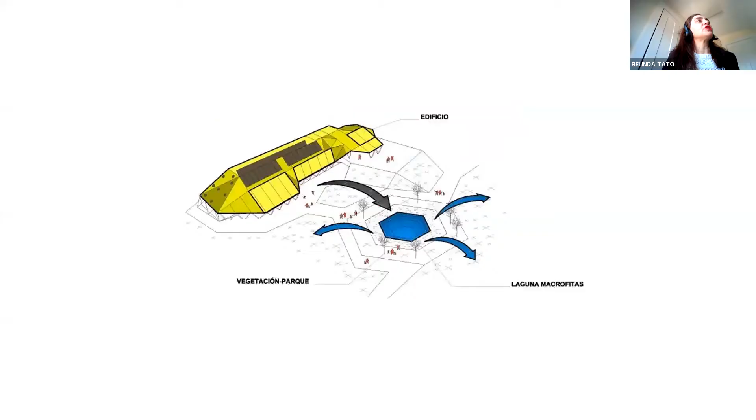The competition was calling for the creation of a new kindergarten, and it was very important for us not only to deliver a good quality, energy efficient building as an architectural piece, but also to provide some kind of publicness or public space linked to it, because in these suburban communities, schools play an important role in creating social fabric and opportunities for people to interact.

Also, because of the location in Madrid, and the tricky future regarding water scarcity, it was important for us to deliver a solution that could recycle all the wastewater from the building. So it wasn't only about rainwater, which can be stored, purified and reused, but also the wastewater from the building.

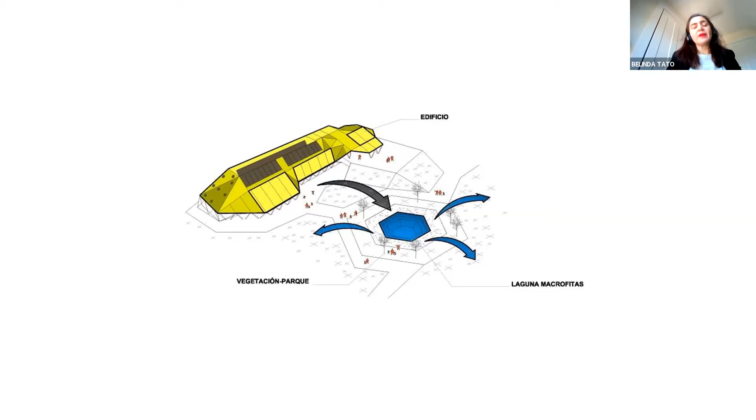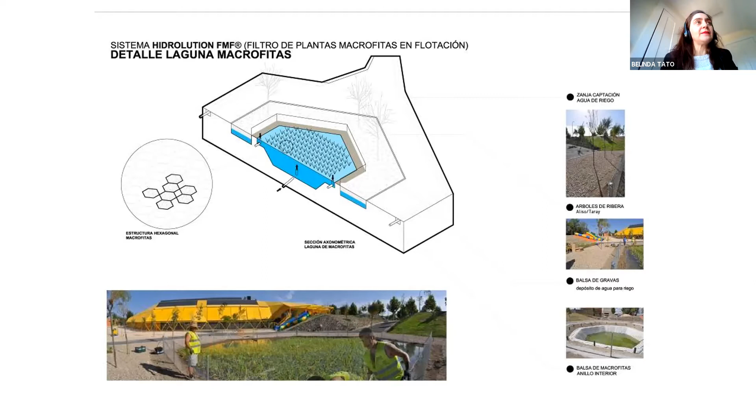So the initial idea was to create this kind of lagoon, and we partnered up with a company that works with macrophyte plants. These plants can clean the wastewater so that we have that water available for reuse.

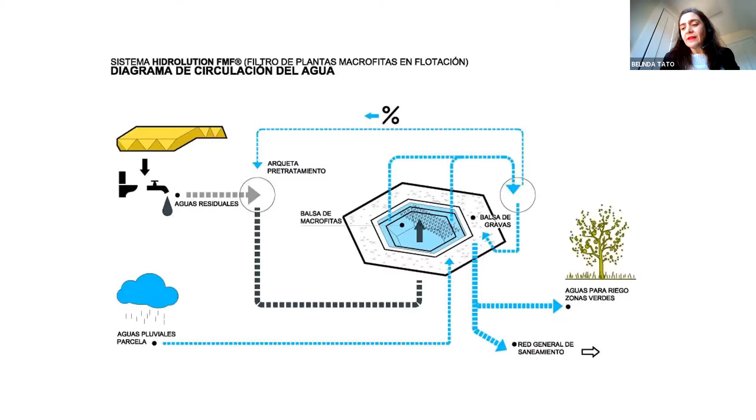It was important not only to deal with recycling the water itself, but also to embed that message and make the space educational, so that not only the school community, but the larger community, becomes aware of water scarcity and everything else.

This is how the plants are floating. The company designed these elements which float in the water, with plants and roots hanging in the water. This is the tank during construction, where the water is stored, then stored underground, and can be reutilized for irrigation of the park.

One of the challenges was that unless we could provide this recycled water, we should not be introducing green lawns, because there's a scarcity of water. It doesn't make sense to use potable water for that.

The site is a very rough environment. It's an industrial site, surrounded by industrial warehouses, with a lot of trucks driving by, and therefore noise and pollution.

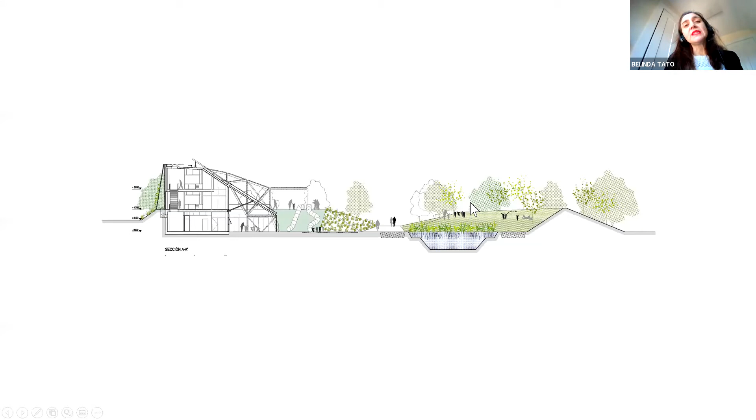The whole idea of the intervention was to create this kind of buffer public space. We created topographies to provide protection for the kids, who are between 0 and 3 years old. The idea was that parents wouldn't just drop kids off from the car, but would actually enter the public space to use the building. These are some images from the building when it was finalized.

Another important aspect, in terms of architectural resolution, is that it's a Class A energy efficient building. We worked with textile awnings that can be operated so that during winter we capture as much sunlight as possible to reduce the energy bill, while in summer they protect the facade and make it efficient.

The space has become a hotspot, a popular space even on weekends, with kids and teenagers hanging out here. It has become a landmark or beacon in the city of Rivas, and people come and are very proud of the space. So we are changing people's lives, because this was an industrial site. It is a kindergarten, but it's much more than that.

It's a public space, it's a gathering space. Here you can see the macrophytes when they're more grown, and it had to be fenced in the end, which was not originally planned, but that's because the deposit is like 20 feet deep. So it made all the sense.

The building has been awarded and has received a number of recognitions, but the most important is that it has had an impact in people's minds and on people who live there.

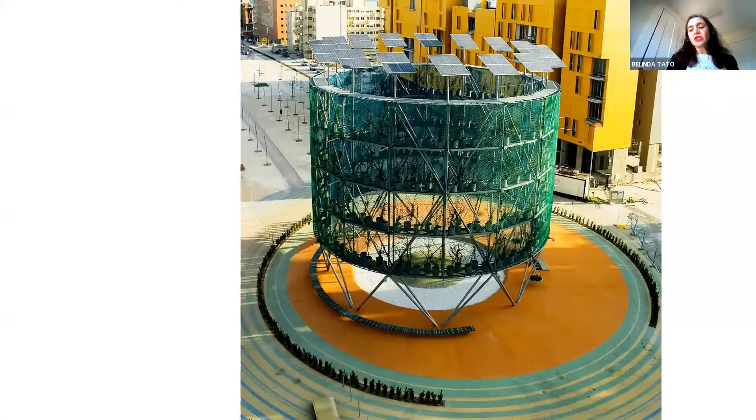This is another project, and the scope here was different. It was a boulevard 500 meters long and 50 meters wide, and the starting point was a kind of planning which is completely new. It's a new suburb in Madrid, but the planning has very little to do with the Mediterranean way of life in which we occupy public space actively. So the original plan was not considering any factor about human scale. It was very much about mobility, cars moving easily throughout the neighborhood, and concentrating all the economic and commercial activity in one spot.

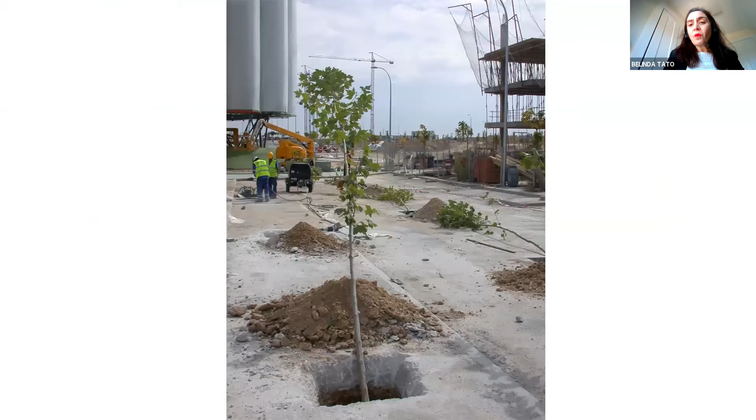It's very little connected to the culture we have locally, which is very much about intensively using public space. So one of the main actions, together with these more iconic interventions, was to plant more trees. We multiplied by three the number of original trees by sacrificing some of the parking lanes. The idea was, looking at this street in the context of the whole neighborhood, it didn't make sense to have such huge space devoted to cars. So we were creating a more pedestrian-friendly street.

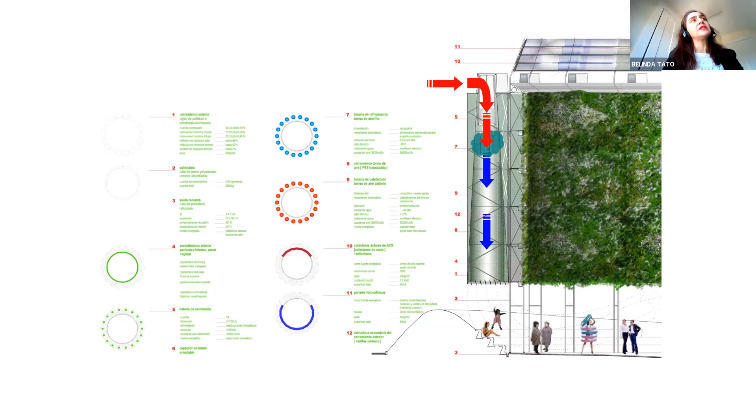The other main idea was to create a climatically comfortable solution. The whole point was about summer, because summer is very tough in Madrid - it's very dry and temperatures are very high. So the idea was, how can we, using low tech and low means and off-the-shelf elements already in the greenhouse industry, lower the temperature by introducing water atomizers? We created these elements - three different ones - but the elements are always the same, just assembled differently. The idea was to create this gathering space, public space, introducing vegetation and misting.

The most exciting part for us is to see that a street that was devoted completely to cars and had nothing to be around for has become a very popular space for different kinds of events. It's been exciting to see concerts, plays, community meetings, and all sorts of activities there.

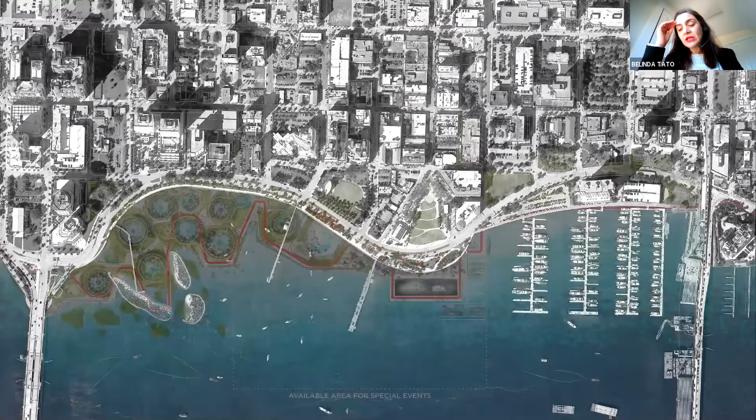This is the city of West Palm Beach. It's interesting because it doesn't have a beach, and the relationship with the water is very tough. There is this harsh, concrete limit between the water and the natural systems and the city. It's also very exposed to hurricanes and other climatic hazard elements.

Our proposal was about how can we reactivate this public space by improving the climatic comfort. As an outsider, coming from a country and culture where we occupy and use public space a lot, even in the summer, it was very shocking for me to see this huge culture around air conditioning here. Actually during the summer, it's the low season because it's very hot and humid.

But for the rest of the year, it's extremely beautiful. I'd say 10 months out of 12 is pretty good to be outside. But still, public space is not that exciting. There's not that many activities, not that many programs.

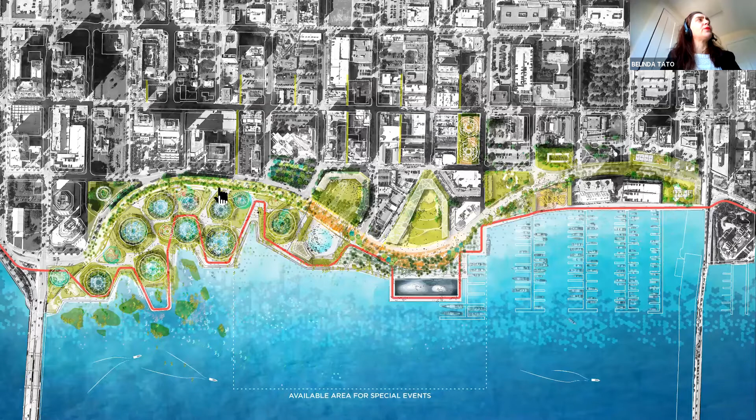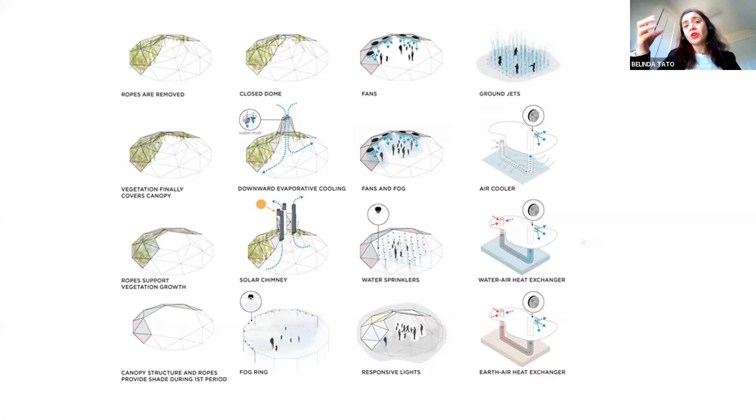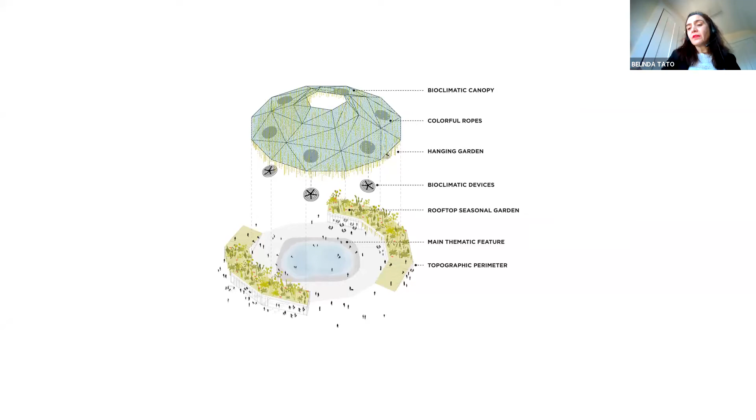So our proposal was about creating these canopies, which would create a different condition, a different relationship between the city and the lagoon. It was about producing a catalog of low-tech solutions that would enable different programs to be hosted — the ground level, the canopy, bioclimatic devices used for different moments during the year.

And the experience of embedding a swimming pool as a feature in public space. We were focusing on climatic comfort and public space redevelopment, but there was an underlying condition about creating equity — because downtown is beautiful and has a lot of amenities, but many neighborhoods are completely underequipped and don't have easy accessibility to the city center.

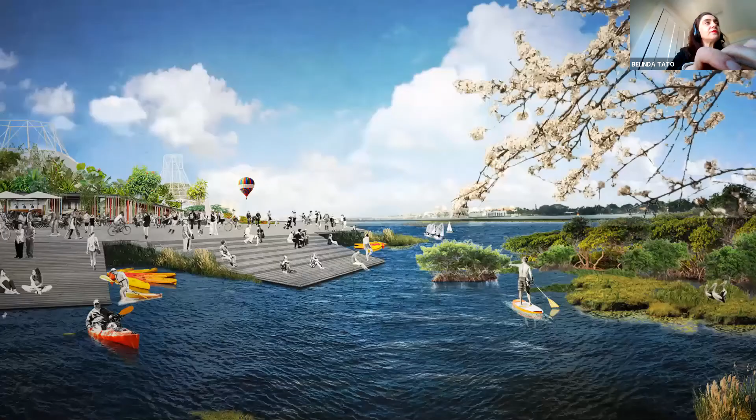So here we have this buffer interface between the city and the water, not only planning for today but also for the future — considering sea level rise and solutions that could react and respond to it. We created a catalog of different conditions for different areas of the waterfront and the city.

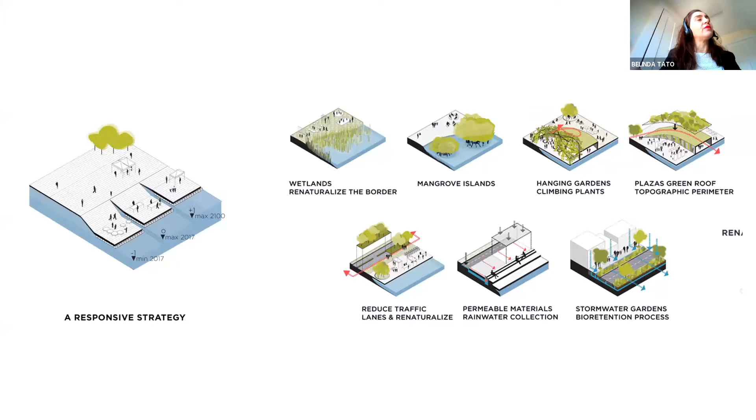Another part of this competition was to redo or upgrade an existing garage building. Again, the idea was to introduce programs which would enable different kinds of people to come in and use the city center, but with a bioclimatic approach.

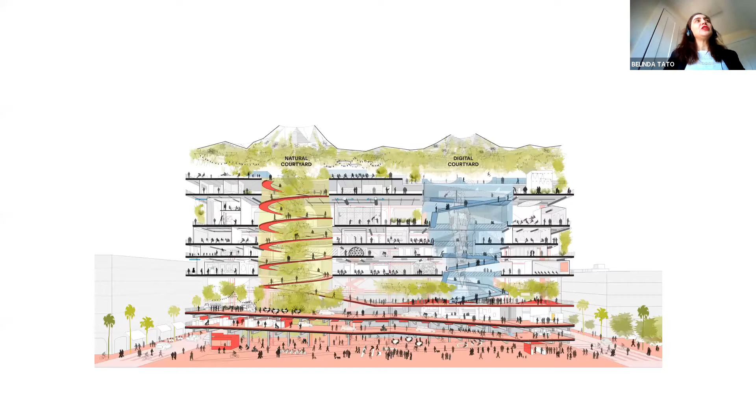As you can see in the section, the red line is a promenade or street that goes all the way from the ground level through this ramp to the rooftop — bringing publicness into a hybrid building that would allocate a number of different programs.

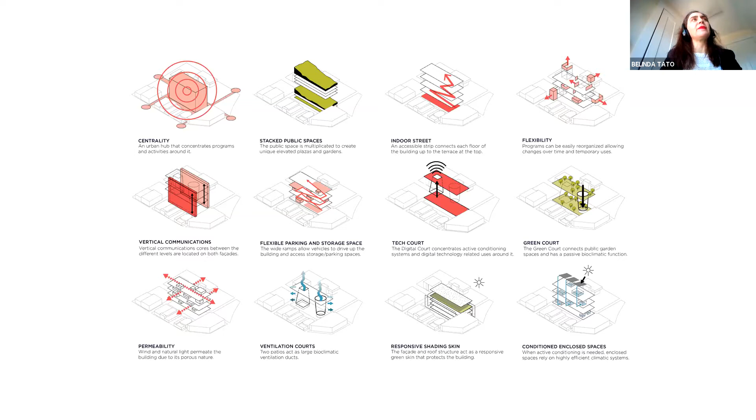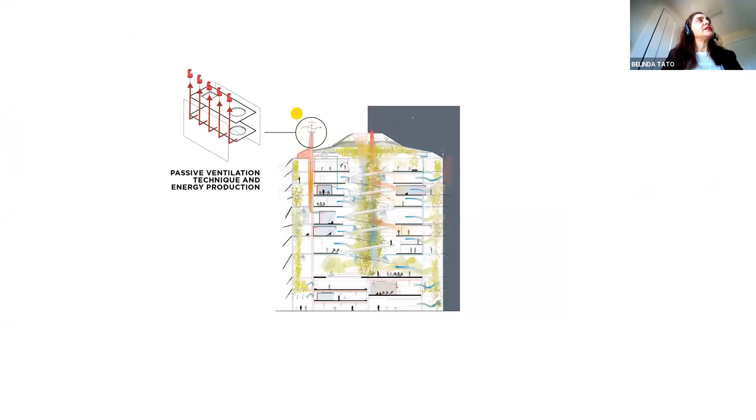Here are some concepts related to the bioclimatic performance and the programs. The idea was to have this natural courtyard, filtrating the air and lowering the temperature, with different systems for both day and night. This is an image of the rooftop.

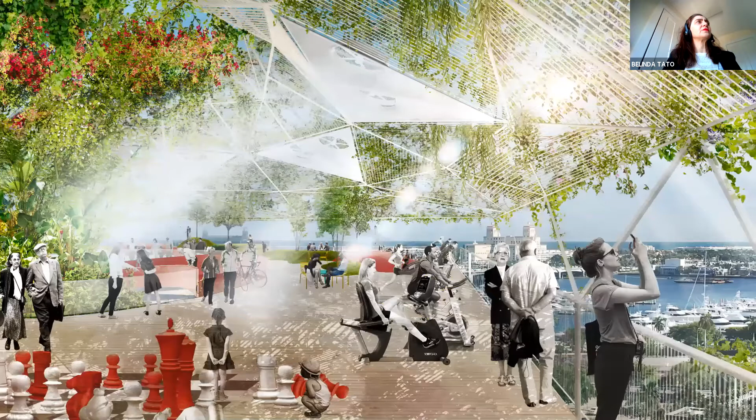This was a buffer space between the existing building and the new addition, with food trucks and everything — how can we bring this kind of public space to this elevated platform.

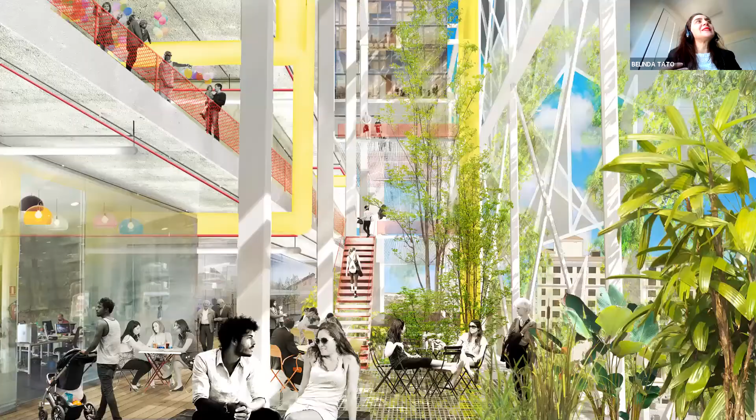And always with this bioclimatic filter or buffer, there are kind of two facades that operate together to lower down the temperature. The idea was to not provide air conditioning to every system, so there were different degrees of climatic performance according to the different programs operating in the building. The idea was also to have a day and night building that would operate for different programs, trying to understand how the circulations would be compatible for these different users and programs.

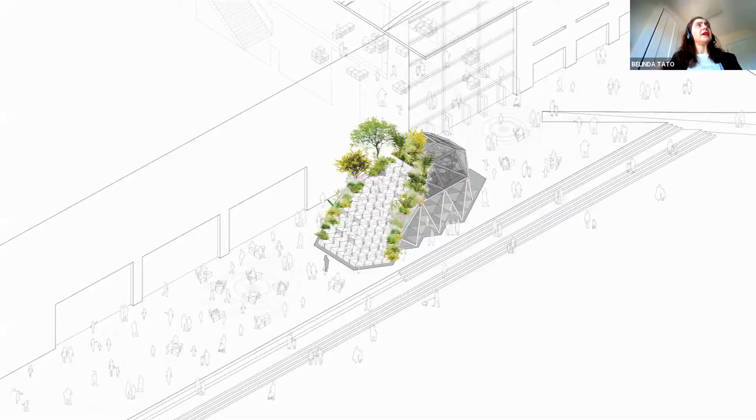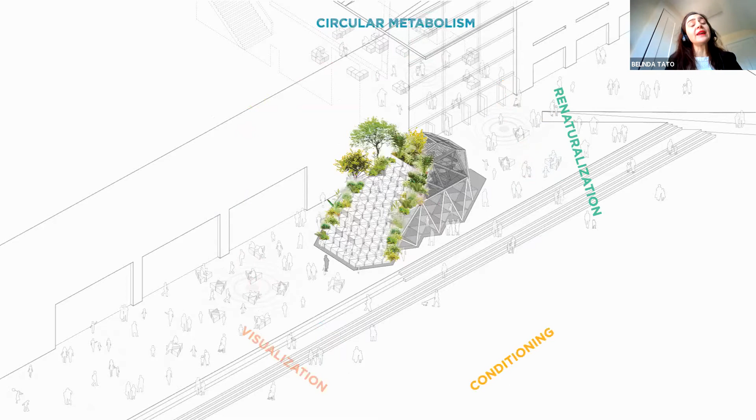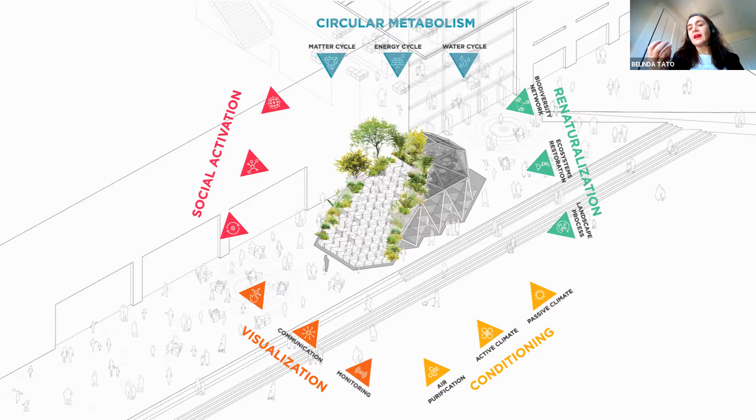This is a small project to be built in the next few months. It is an installation in front of a cultural institution in Spain, and again it has this environmental component, but also an educational component. It is about recreating the Mediterranean forest, trying to make it a kind of landmark and a point of entrance into the cultural institution.

Regarding the second aspect, which is technology, we have been exploring over these last few years ways of engaging with the community and getting people engaged with their public space and with others through the use of technology. I'll be showing a project in Malaga that we are currently implementing. It's under construction right now.

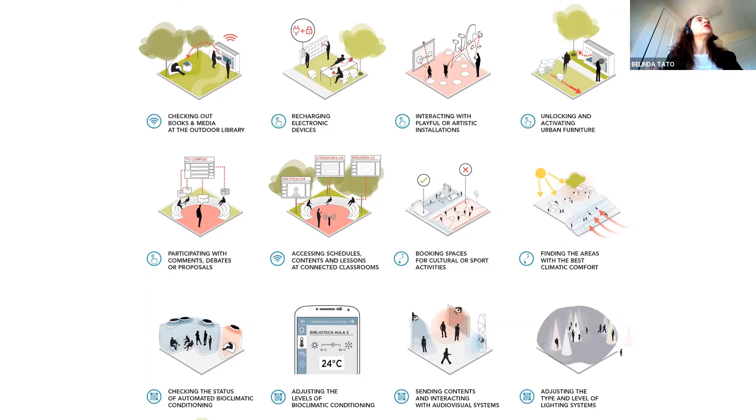It is about how we can transform public space into a space that can be customized for different uses and different programs. We've been exploring this idea of how we could have a classroom operating in public space. This has not emerged because of COVID, which is interesting because it's actually very relevant — this project was designed before the COVID situation, but it plays with the idea that in certain contexts, climatic conditions allow you to have a more intense use of public space, and how we can explore different possibilities of being outside and interacting with others, making the most of it.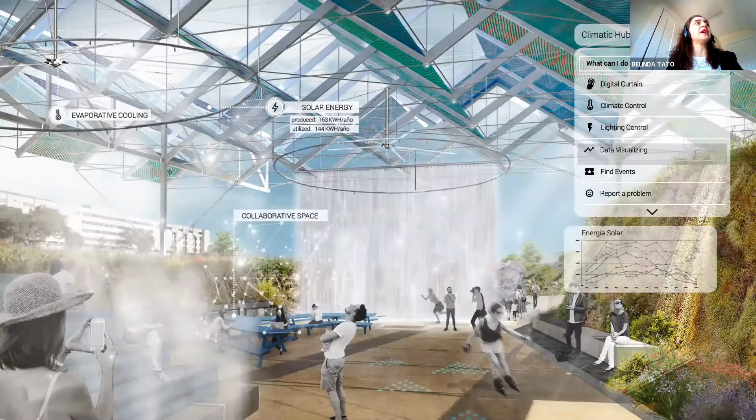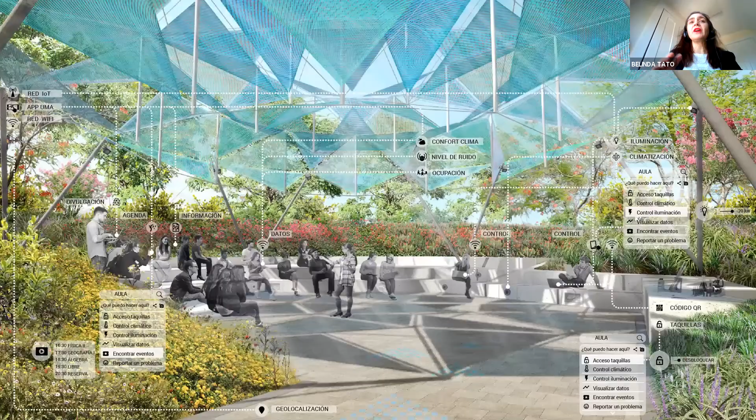So these are kind of portions from this Malaga project. The Malaga project is for the university campus, a 2-kilometer boulevard. The starting point was: can we bring some of the academic activity that usually takes place indoors, and doesn't blend with the city or citizens at all, can we bring it outside? Can we create a more exciting experience, both for the students and for the citizens? And how can we enhance this experience by introducing features that can be customized for day, for night, for lighting conditions, for climatic conditions, and so on, for projections and so on.

This is a small project we designed for the city of Dordrecht in the Netherlands. The departure point was to create a playful object, a kind of playground for kids. We like to think of sustainability as something positive, something we can embed into projects, and something that should be playful. We should also empower and educate the younger generations, because they're the ones who will be taking over and leading the world in a few more years.

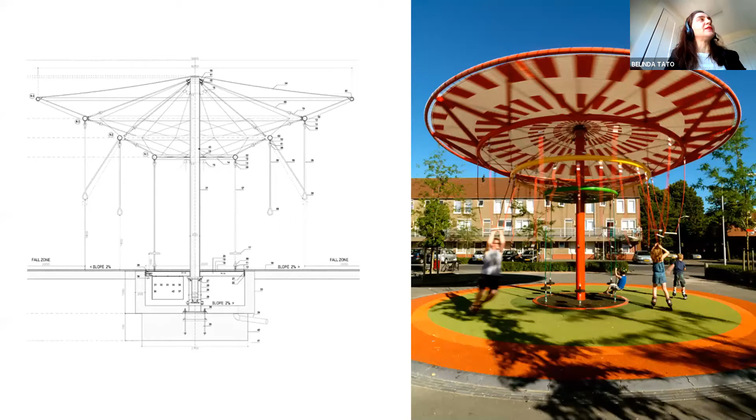The project plays with the idea of producing energy from the rotation of the carousel during the day, so that energy can be utilized for lighting during the night. So the more the kids play, the more energy is produced and the better the lighting will be. This was implemented, and it was very interesting and very challenging, because complying with all the European codes regarding playgrounds was very tough, but we managed. In the end, we saw kids using it in very crazy ways that were not expected.

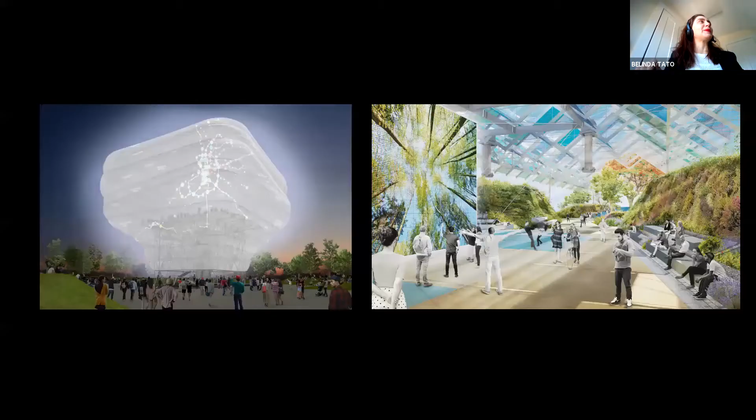This is a small project we conceived for the city of Madrid, again as a beacon in which people could interact and relate to each other, sharing content through this kind of landmark element. This is the project, and the one on the right is the Malaga project that we will see in more detail later.

It's about using — I would like to say that of course we are not software developers, we have cooperated with software developers — but the most interesting part is thinking about how we can take advantage of today's technologies that are already on the market, already accessible, to introduce and hack the public space and use it in different ways.

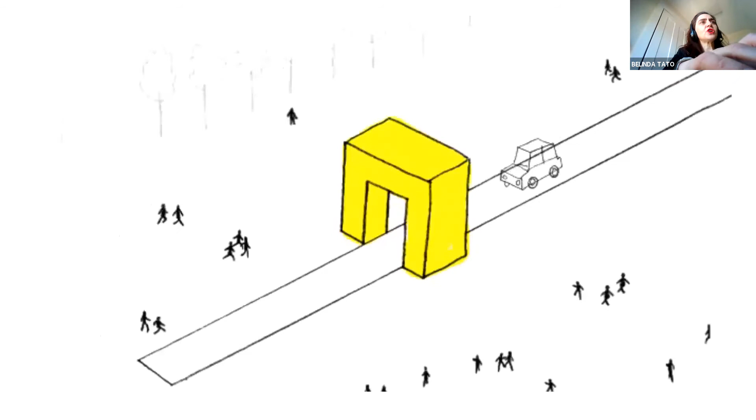We entered a competition in which they were calling for an artistic intervention in the main public space of the city. Our approach was: instead of having a single mind or a single team designing an art intervention, why don't we design a process that is collective, that engages the local community, and thinks about the future not only of the square, but also engages a larger conversation. The competition had different stages, and this was the final stage in which we delivered this video together with a booklet. So we're going to watch it.

As I was saying, they were calling for this competition, and our initial motto was: instead of one square, it's 1,000 squares. Why don't you, instead of using that huge budget on doing something final conceived by a single mind, create a process in which you can test out different ideas, different solutions, and engage the community along the process. So we won the competition, and that started a negotiation process with the board of the city, but we managed.

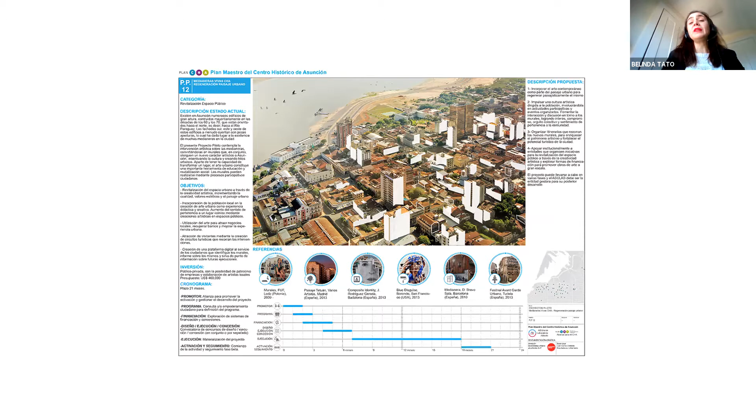One of these pilot projects was about transforming party walls into canvases and inviting artists from the country, or from around, to produce an art piece throughout the city. They did this, and it was a beautiful festival organized for only a few days, with artists invited from all Latin America. So with just a few resources, a whole kind of transformation could happen.

And not only that, but it was also about creating a completely new mindset about the city center, and getting people to walk the city in a completely different way, with new lenses about these art interventions.

So we also work with these two colors, red for the problems, blue for the opportunities. And it's kind of tricky because when you come to a place, you ask for people's time and dedication, and they're very generous to be part of it. You have to find a way to give something in return.

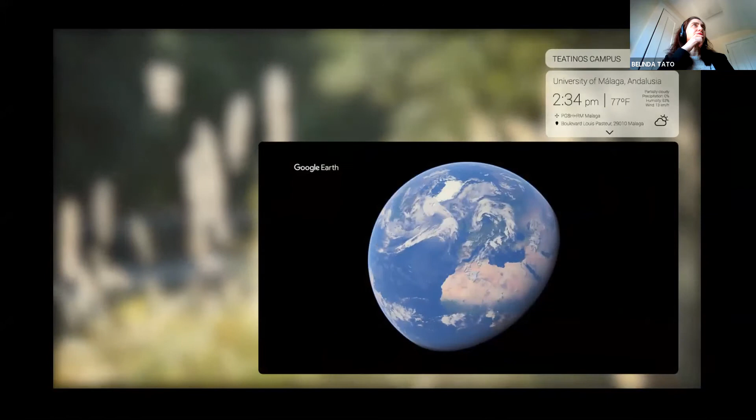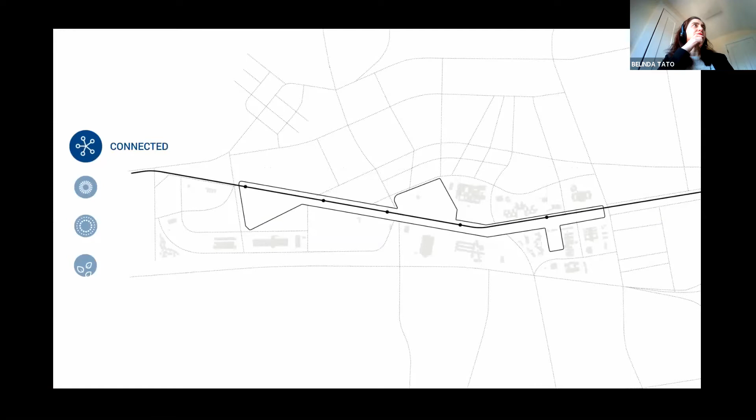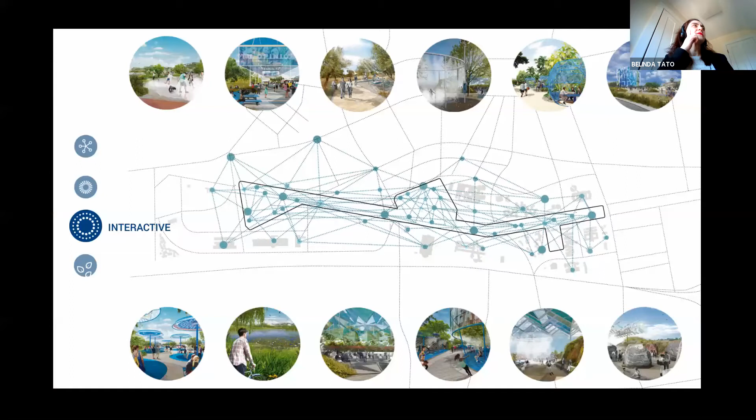The main boulevard at the Universidad de Málaga connects existing facilities and opens up the campus to the public, creating a pedestrian walkway activated by hubs or public squares with learning and leisure spaces, incorporating technology to create an interactive urban environment connected to the digital world, an ecological corridor that efficiently manages resources, creating diverse natural landscapes.

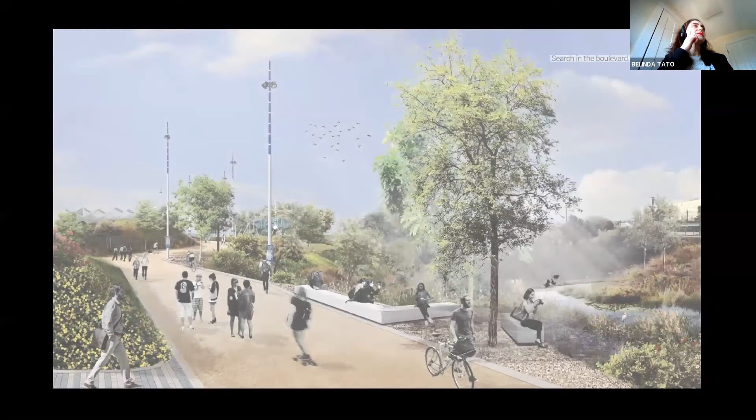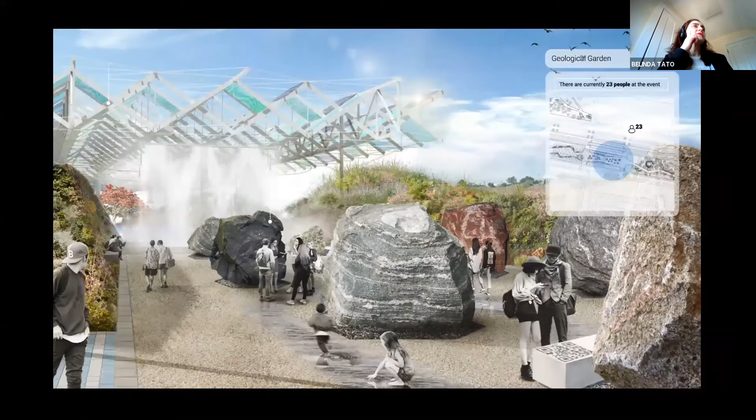Pedestrian walkways protected by natural buffers become the perfect setting for meeting up, resting, and relaxing. Through a digital application, users can interact with the surrounding environment and access an augmented reality with academic and cultural content.

The Climatic and Digital Hub integrates collaborative learning spaces, allows the interactive modification of environmental conditions, and generates all of the park's energy. The Hub's canopy hosts technological systems that connect users to the physical space and the digital environment.

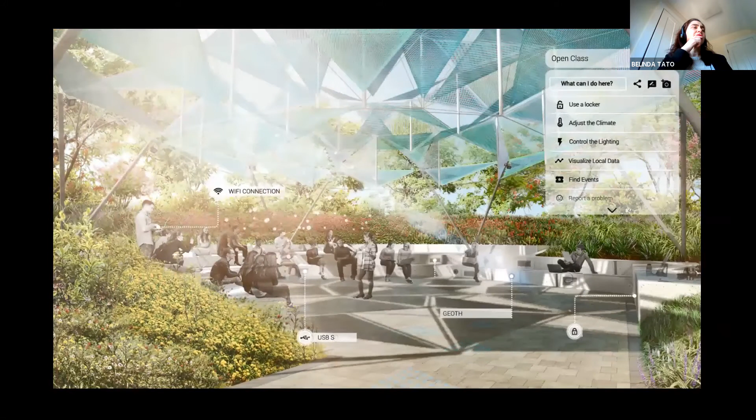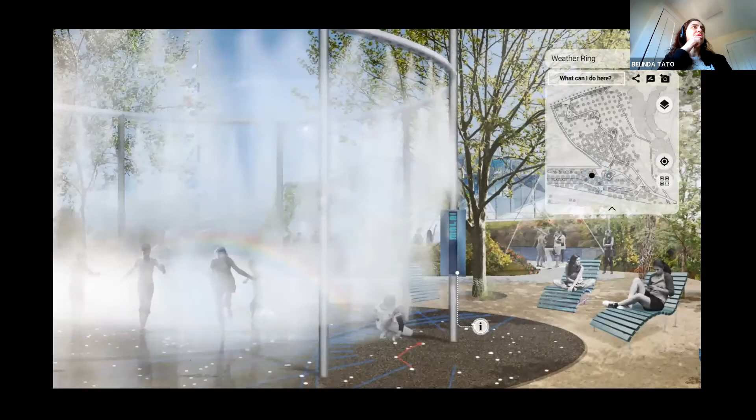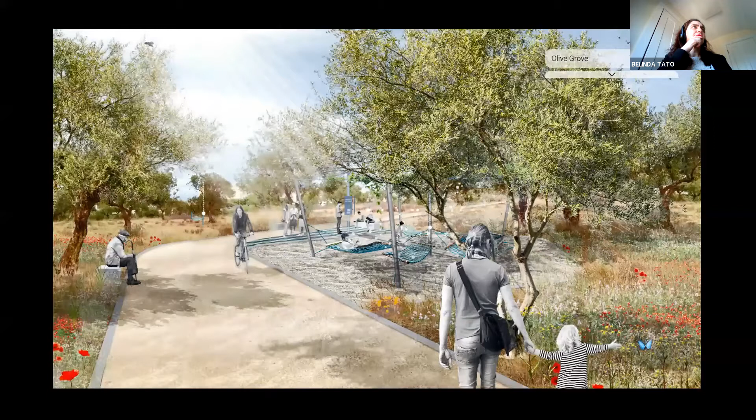Along the boulevard, open classrooms are equipped to extend the university experience to public spaces. An extensive network of sensors generate open data that enables climatic research and allows real-time identification of the most comfortable zones of the boulevard. The tranquil Olive Grove's open library encourages reading and resting while promoting and protecting biodiversity.

A connected, open, interactive, and green campus. An intelligent natural space with positive energy balance and bioclimatic comfort. A positive space where collaboration, creativity, and learning define the urban scene.

Okay, I'm gonna play them the video about West Palm Beach. Nope.

Can we dream about urban atmospheres that connect us to nature? Can we imagine merging aquatic activities in urban life? Can we combine natural elements and technologies to provide climatic comfort year-round? Can we create a flexible building that promotes entrepreneurship, citizen engagement, and digital interaction?

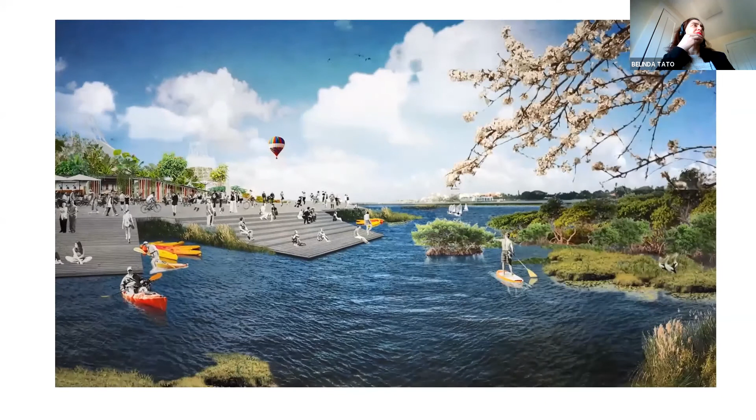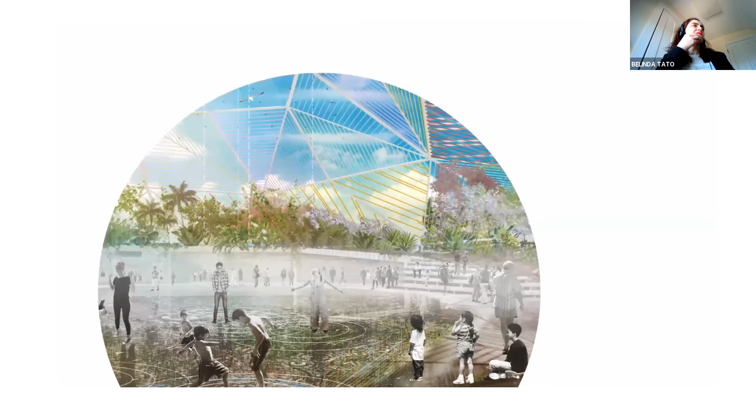Open Shore creates the framework to experience an urban wetland landscape, enjoy the city while swimming, discover a rainbow on a sunny day, connect with others and get inspired.

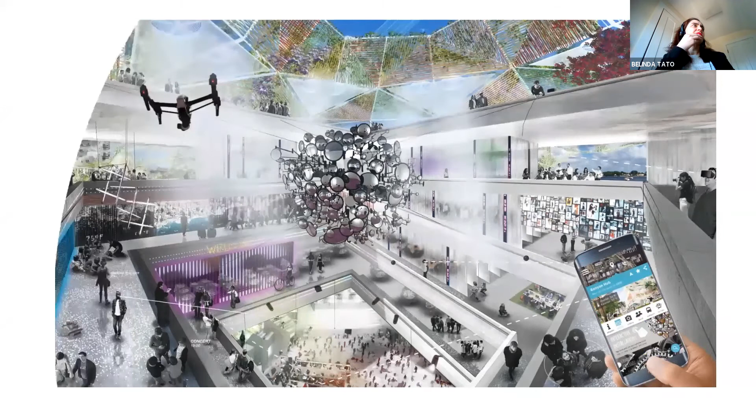Open Shore's proposal for West Palm Beach is based on the identification of opportunities, the definition of actions and strategies, and the achievement of key improvements towards a vision of a lively urban environment. Open Shore addresses West Palm Beach holistically, considering urban, cultural, social, economic, and environmental aspects. In order to connect the urban vision with a coherent design, we have to look into the different places and programs to carefully identify their potential.

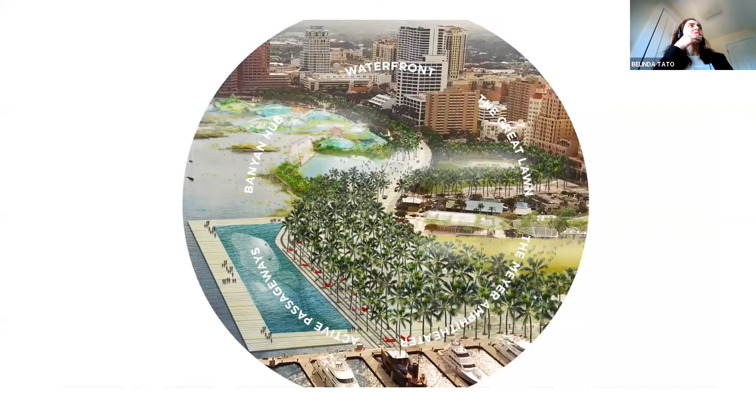The new waterfront is an extraordinary opportunity to reconnect the city to the water, making good use of West Palm Beach's spectacular location.

The Great Lawn, already a central piece in the city's urban life, will become the urban living room of West Palm Beach.

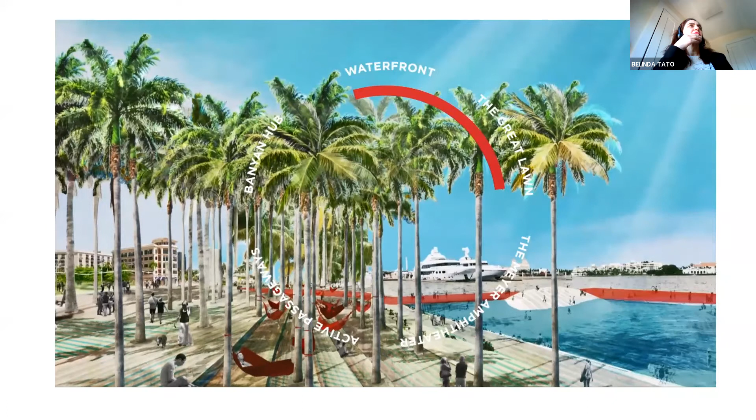The Meyer Amphitheater will be the ultimate space for great urban events and all kinds of cultural activities.

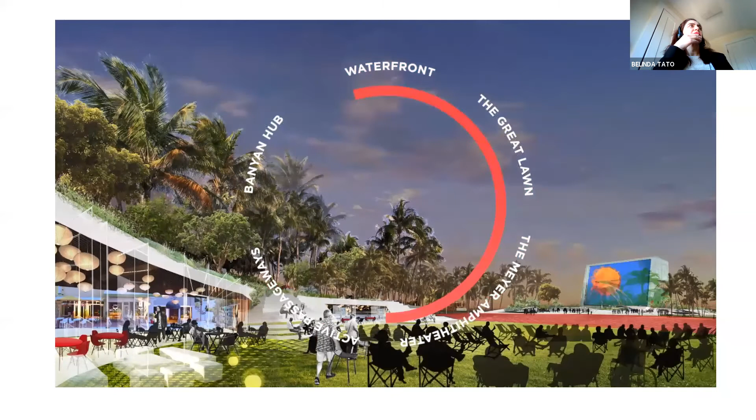The alleyways will undergo a rapid activation process, ranging from temporary interventions to the development of permanent structures to host new programs. The former Banyan Garage is reimagined as a new focal point for activities, attracting business and talent to create knowledge, cultivate culture, and foster innovation.

Open Shore provides a set of tools to reimagine these places and positively shape the urban transformation of the downtown.

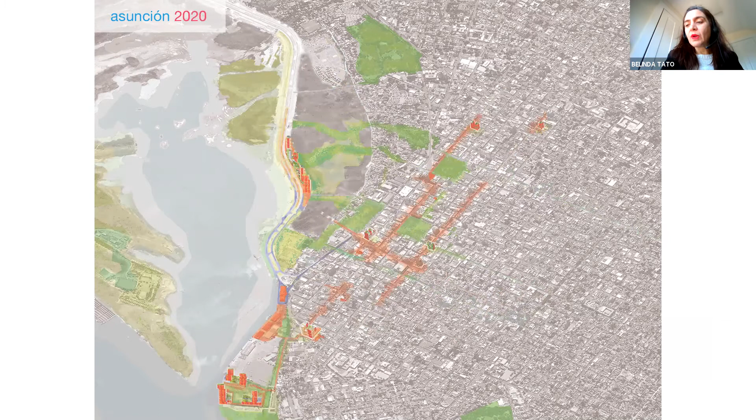I would just like to finish saying that communication is very important, as you could see throughout the presentation. If we're aiming to engage with a larger population and not just our peers, we need to create documents that are understood, that are exciting, and that are appealing for the general public. So we're always exploring how we can present ideas in a more appealing and clear way.

So yeah, these are just some examples, but we work a lot with video, and video challenges us to make short stories, which is difficult because sometimes we talk a lot and our projects are very complex with many branches. But it's always been an interesting exercise to synthesize and compress ideas into one single video. So that's it for now, I leave it here.